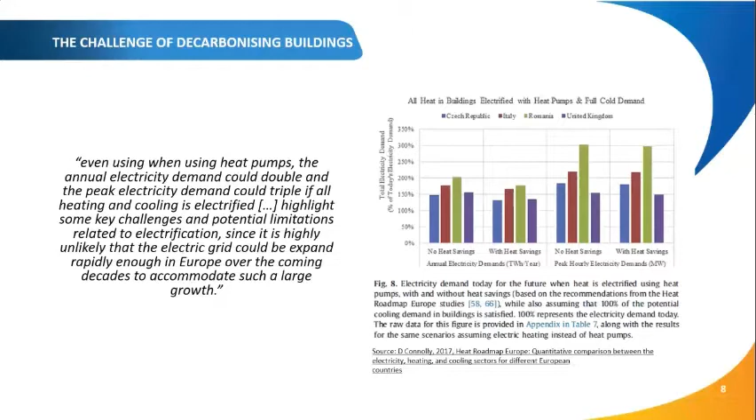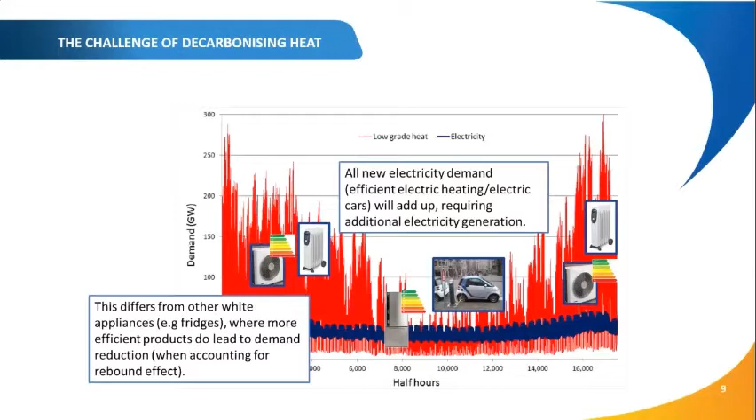Now, what is the role of cogeneration in that? Cogeneration has a single input, which is a molecule. It can be biogas, natural gas, or hydrogen. We have two outputs. So a primary energy is transformed into two final energies. One is heat and one is electricity. And the nice thing about cogeneration is that those consumption peaks occur at the same time.

So if there's a heat demand, we generate the electricity. And in today's energy world, we also have an electricity peak often occurring from heat, electrified heat, like a heat pump, which is basically an efficient electrical heater in this respect. It's transforming electricity into heat and extracting some of the heat from the environment.

So we are basically perfectly complementary with cogeneration, as whenever the heat pumps produce a peak on the network due to the heat demand in the buildings, cogeneration is providing the heat to its local building, but also providing the electricity to this building at the same moment in time. And with this complementarity, the proportion of heat pumps and fuel cells should be adequate to have savings on different levels, and I will come to that in the next slide.

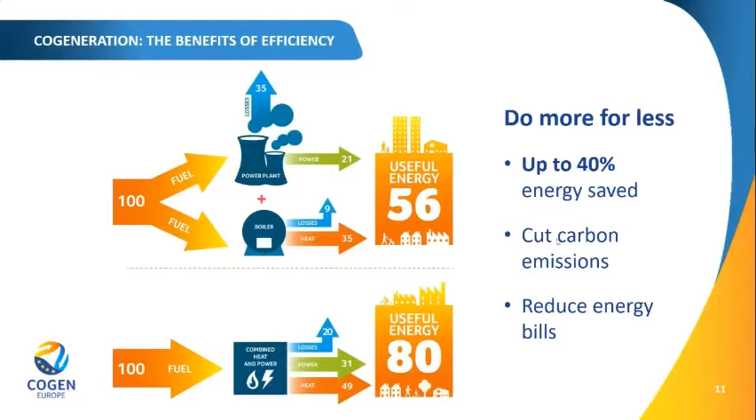Within Europe, we have several cogeneration technologies. Overall, we have 100,000 micro-CHPs installed in buildings, and more than 10,000 are stationary fuel cells. This is the recent technology that has now started to be implemented at a bit larger scale. COGEN Europe has a very active role in two deployment projects, Ene.field and PACE. And we look forward to the cost reduction achieved through those projects for further deployment.

But CHP can also be applied not only in the residential sector. The more common one is CHP to feed district heating networks or larger public buildings. And finally, in industry, combined heat and power is a quite standard technology for many applications where you have a continuous need for higher amounts of heat. You also exploit electricity generated locally.

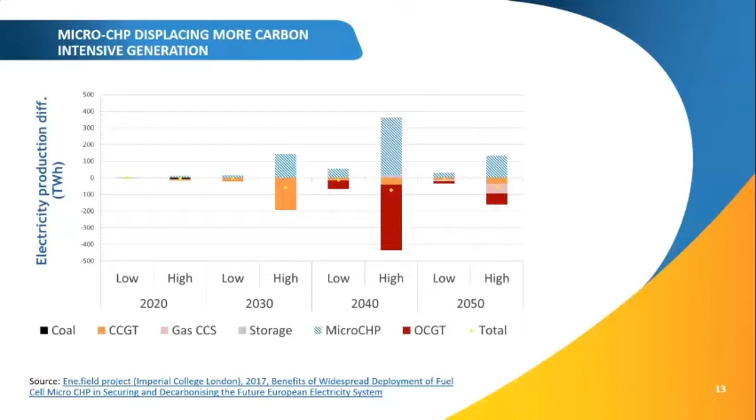Out of the studies that we have pursued, we see potential for micro-CHP uptake of up to 31 gigawatts by the year 2030. Important to understand is that by producing the electricity locally, very close to the end user, we avoid grid reinforcement costs. We avoid grid reinforcement costs on the one side in the low voltage sector.

We are producing the electricity at 240 volts in the customer's house, but you also see other effects in the medium and high voltage grid that are still significant, because the gas infrastructure allows a more extensive use. The gas infrastructure is higher in power density and has already been built for a long time. There are significant reserves available to distribute this out to the end user.

And deploying micro-CHP at a large scale provides the option to have up to 28% of the EU's projected grid reinforcement needs covered by micro-CHP. So it means you don't need to have a long-term investment in the large electricity infrastructure that, besides the cost, also has an issue in terms of speed of deployment.

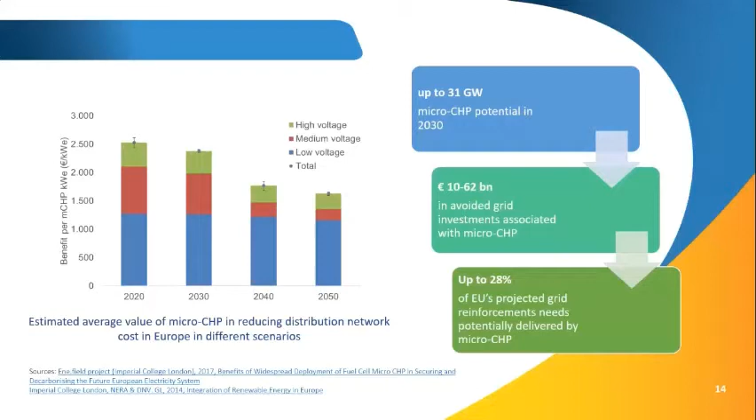So what does micro-CHP do overall, or cogeneration overall? It is linking the different sectors, creating an arbitrage between the electricity, heat, and gas systems. This, on a system level, is improving the overall efficiency. It's very important. It is not wasting the heat out of an electricity generation process, but directly using it.

But it's also compatible to the use of, for example, excess electricity under the form of hydrogen or biomethane, or cogeneration in other district heating cases often uses lower grade biomass to directly generate both the heat and electricity locally.

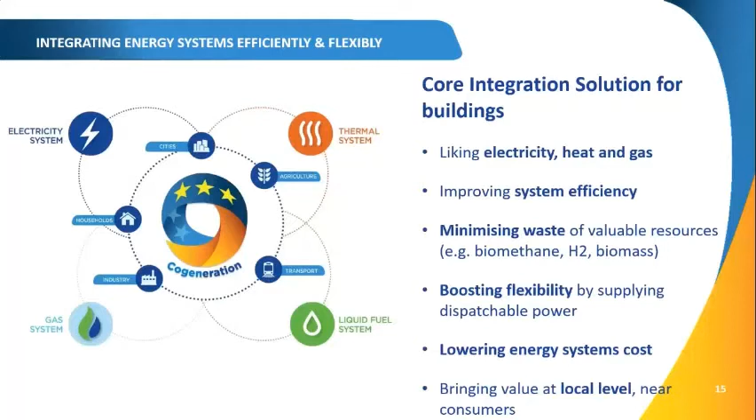Micro-CHP are small plants, so they provide flexibility to the grid, dispatchable power, and overall they lower the energy system cost. And also important, wherever you have those systems, they need to be maintained and installed. This is local job creation, in a distributed way, and not at a single large power plant. Next slide, please.

Next slide, please? You have an issue with this slide? Or is it my screen that is frozen? We are on slide 16 at the moment. Okay, I am on slide 15 in my screen. That must be my screen. I apologize. Okay. Oh, now it changes also. Yeah, okay.

So, what does cogeneration provide overall? It cuts carbon emissions already today with the installation and reduction in the primary energy, and it's forward compatible to the reduced carbon footprint from the gas grid. It lowers the energy costs at the end user by the reduction of the primary energy usage. It is integrated with renewable energy vectors, and overall we have energy savings.

Important as well is it empowers citizens and businesses. It creates autonomy, and the local energy production is helping to create and stabilize the overall grid. It provides the flexibility in terms of balancing with the different schemes of electricity production that are intermittent, so stabilizing overall,

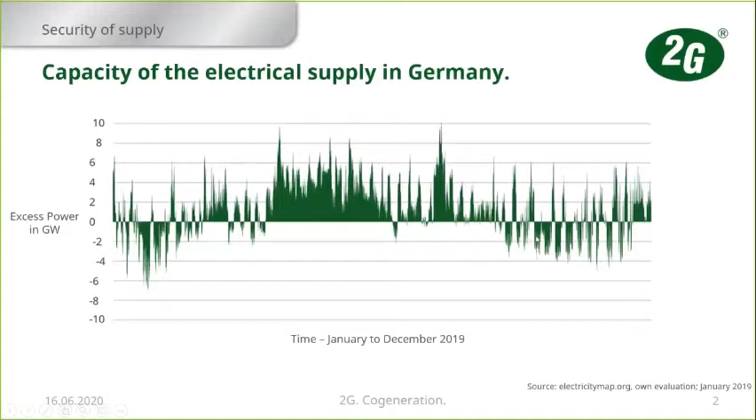But there are also wide ranges where there's too little power, and wide ranges in the summer, for example, where there's too much power. And the reason is mostly the renewable energies which are fluctuating, especially wind and sun. And we think that it would be a good idea to use the renewable energy power to produce hydrogen, to shift this energy to the times when we need the energy. So how could such a system look?

Of course, the source is always wind and sun. These are the renewables. And of course, it makes sense to use the electricity if it is needed for homes and industry. And for the peaks, we can use a battery storage. This makes sense.

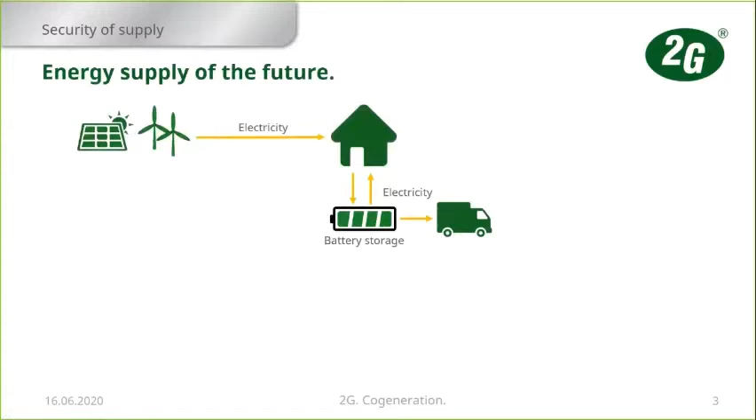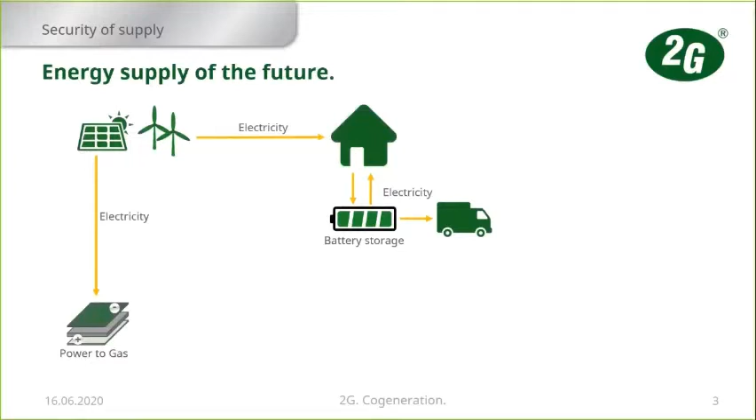But to use it for the long term energy capability, we can produce hydrogen with power to gas plants. And this hydrogen can be used in two ways. The first way can be methanization, so we can put it in a gas, store it in gas storages for natural gas and use it for normal CHPs. This can also be supported by biogas plants. And the second way is that we use this hydrogen directly for these CHPs.

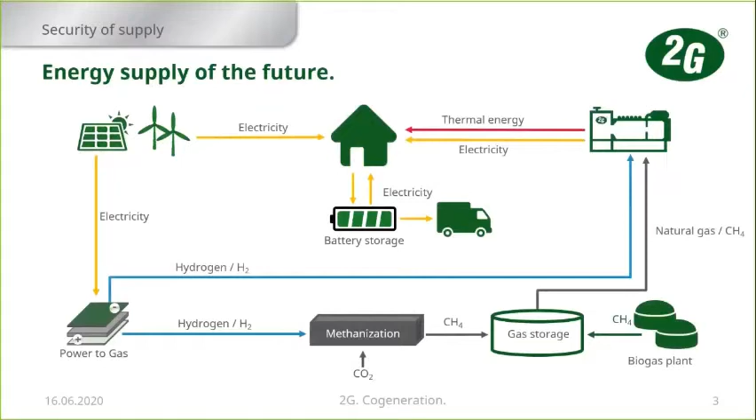So this is what is done in Haßfurt. Let me introduce you to the Haßfurt concept. Haßfurt is a small city in Bavaria. The local utility provides energy for about 20,000 inhabitants, and they are very innovative concerning CHP, microgrids, and district heating.

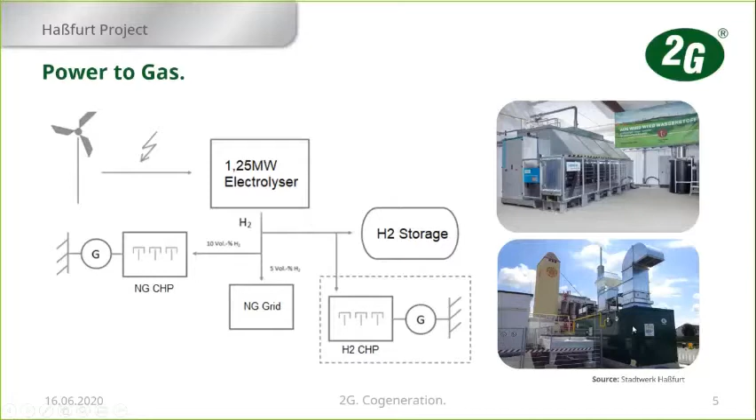So what is the engine technology that enables the use of hydrogen? Especially it's the gas injection. Because if we want to burn hydrogen, we cannot use an external gas mixer. The gas mixture between hydrogen and air would be much too dangerous because of the high flame velocity of hydrogen, and so we need a gas injection.

And we decided to use a port injection, so it's not directly into the cylinder. It's an external mixture formation, but close to the cylinder. This is a big opportunity for the Haßfurt plant because then we need much less pressure than we would need in a direct injection.

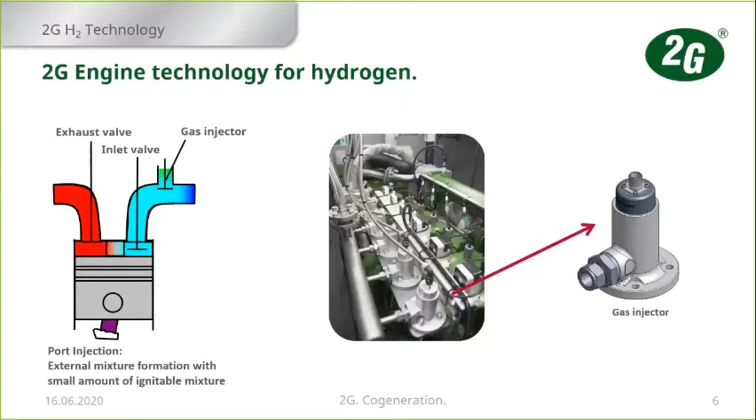And the second highlight on this engine is that it's a dual fuel engine. We can use hydrogen and natural gas. So this enables the utility, if the hydrogen storage is empty, to still run the engine on natural gas. And the engine doesn't have to be stopped for this switching. We can make the mixture while the engine is running and switch slightly to natural gas.

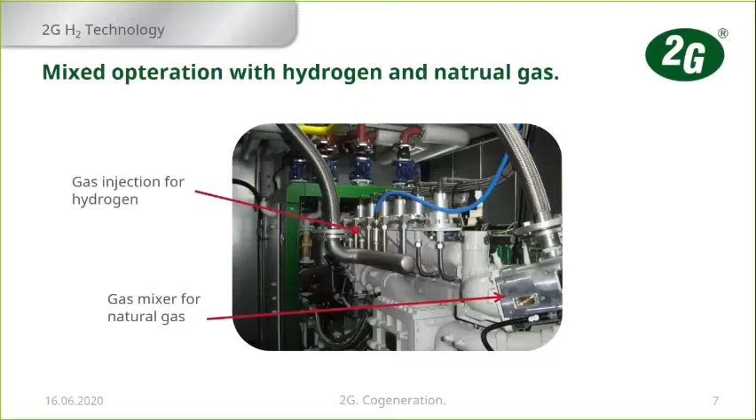In the last step, let's have a look at the environmental compatibility. Because as you know, it's still an engine, and of course emissions are a big deal. And on this slide, we have an overview of the NOx emissions concerning the lambda. The red line is for natural gas, and the blue line is for hydrogen.

And what we see here is that if we use hydrogen, we have a very wide operating window with very high lambdas, without ignition failures, because of the low ignition energy of hydrogen. We can burn it very lean, and this enables the engine to run on very, very low NOx emissions. So it's very environmentally friendly.

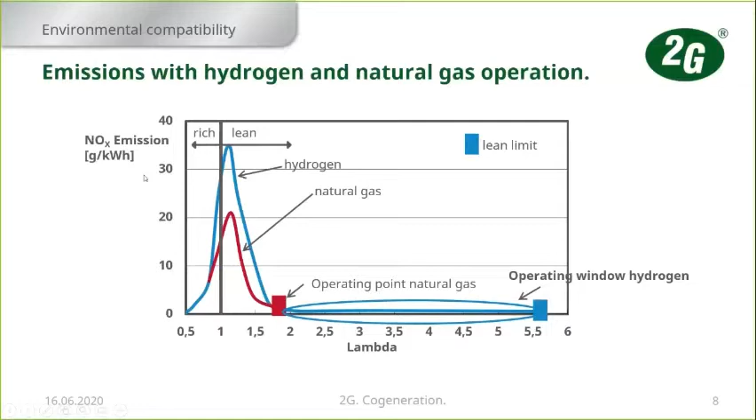Yeah, and in conclusion, we think that cogeneration with its efficiency can support the new renewable energy, and it can bridge the gap between the energy consumption and the capacities of our ecosystems.

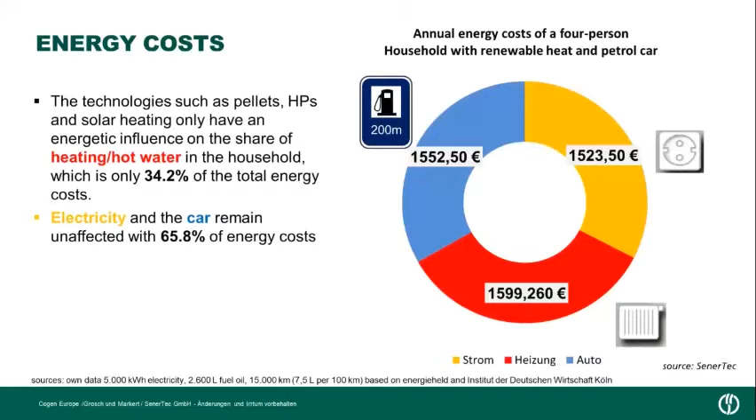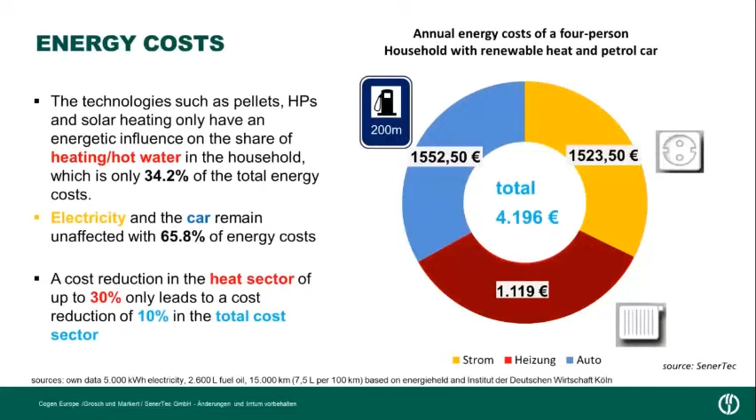So let's have a look at what can be done when you use pellets, heat pumps, or solar heating, which only have an impact on 34.2% of the energy costs. That would mean you can take the heat out of this and make savings on that. About 30% of the heating you can save with these renewable energy producers. And overall, the costs would only be 10% less.

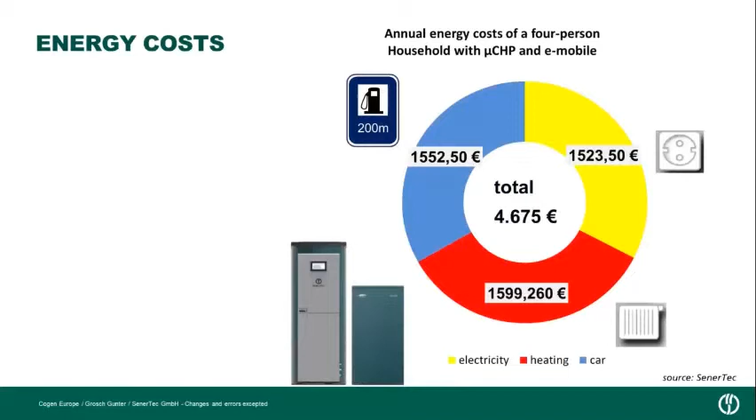Let's take a look at the micro-CHP unit in this view of the four-person household. A fuel cell micro-CHP has an impact on all three sectors: heat, electricity, and the car. And this would reduce the total costs by 30%, not only the heat. Therefore, heating with gas, generating electricity when heating, and driving with electricity. The numbers show you that it's the best way at the moment to save most of your energy in your household.

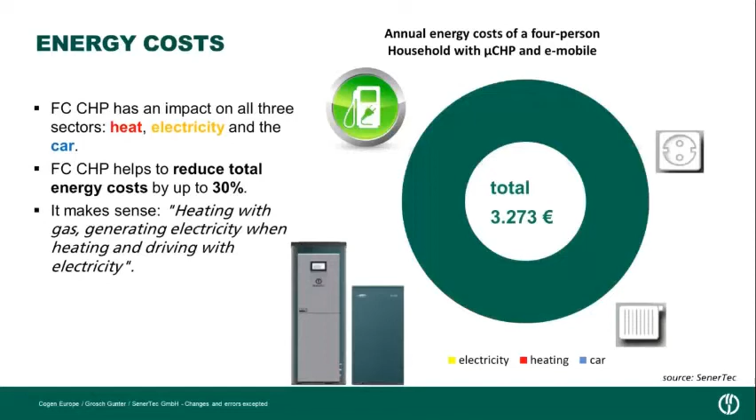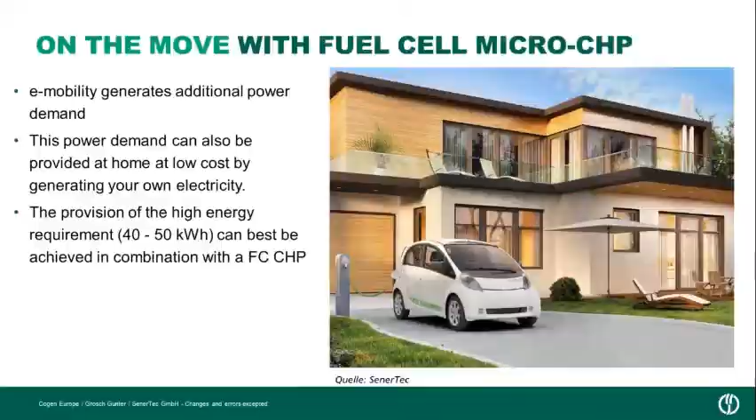On the move with a fuel cell micro-CHP system, e-mobility generates additional power demand. This power demand can also be provided at home at low cost by generating your own electricity. The provision of the high energy requirements, 40 up to 50 kilowatt hours, can best be achieved in combination with a fuel cell micro-CHP. I will underline this with two case studies from our customers.

The first is a building built in 1996. It is a semi-detached house with a living space of 135 square meters and 4 inhabitants. The energy data are from 2015 and 2016. In 2015, before changing the energy system, a gas condensing boiler consumed 13,849 kilowatt hours, and the electricity demand was about 5,000 kilowatt hours.

Then they installed a Dachs InnoGen system from us in 2016, and from that time on, the gas consumption is 18,000 kilowatt hours a year, and the electricity from the utilities is only half, 2,520 kilowatt hours. That saves 850 euros a year in this household, and they are very pleased with this decision. I will come later to the motivations, how the decision was made.

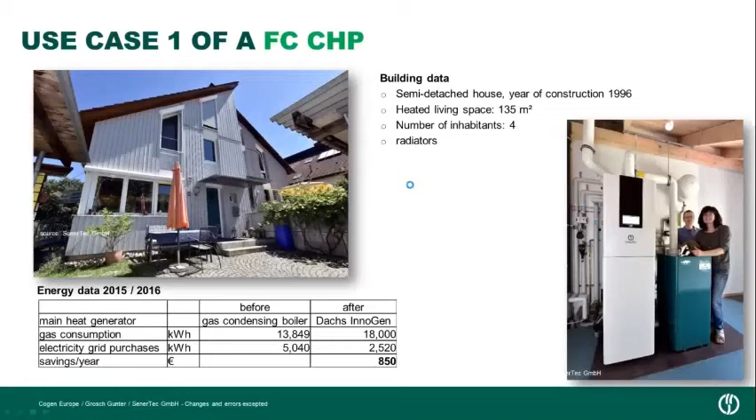The next case study is a semi-detached house, constructed in 1963, with a living space of 130 square meters. Windows and doors are already energetically renovated, and this was done on the advice of an energy consultant who told them it would be good to do this first. Also, roof insulation would be very good; the brick wall is not necessary, it's okay.

What he then decided was not to do the roof insulation. He wanted to install the fuel cell heating system. He has taken a fuel cell with a peak load boiler, also integrated in our system, and a fresh water station using the flow-through principle. So Legionella have no chance in the system. He also added a battery storage of 6 kilowatts.

And then the energy data before he changed his heating system: an oil boiler that needed 2,500 liters a year, and his electricity demand was 3,100 kilowatt hours. With the new Dachs 0.8 system, the fuel cell MICRO-CHP, he only needs 1/3 of gas to produce his heat and power. And the electricity grid purchase is about 1,200 kilowatt hours. It's only an assumption because the system hasn't been running for 1 year; it was installed in November 2019. And the amortization is calculated at 12 years.

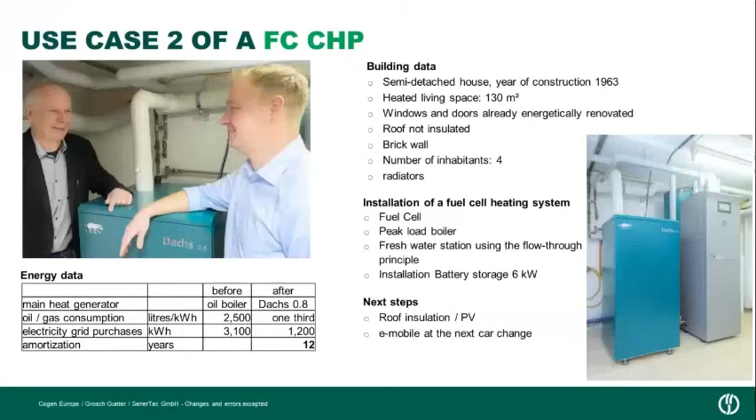And one of his key sentences was, "We have 2 children and would of course like to dedicate to them something that is valid for the future. Thus, energy efficiency and climate protection are especially important to us."

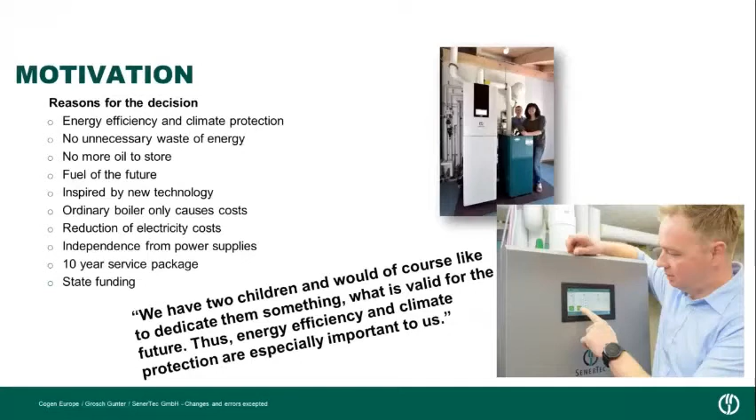Yes. And my last slide will show you the benefits for the buildings. It's electrical efficiency, the overall efficiency. Let's say the standard of heating is A+++ and also of domestic hot water. The fuel cell MICRO-CHP can ensure particularly low heating costs by producing their own power self-directed. The owners of the building are one step closer to being independent from the power supply, and it's virtually silent because there is no rotating system.

Supporting the energy system all over Europe or all over the world, lowest emissions, only emits water and air, largely free of pollutants, flexible use, capable of base and peak load power and heat supply. Flexible use of fossil fuels and renewables, as we have just heard from the 2G project in Hadbjerg, and fuel cell MICRO-CHP systems designed to utilize renewably produced hydrogen can contribute to linking the 2 sectors and decarbonize their energy system.

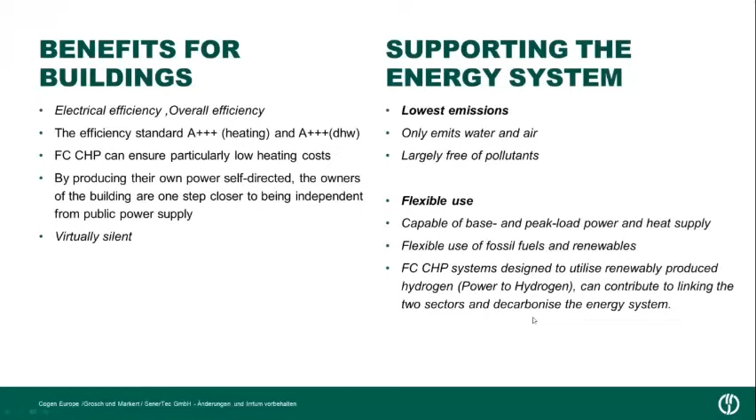Thank you, Gunther. Thank you for the introduction on fuel cells, as well as the two very interesting case studies of private citizens investing in fuel cell micro-CHP. We are now pivoting to our last speaker, Christian Neve from EC Power. I apologize if I mispronounced your last name. I'm looking forward to this presentation because it's about how cogeneration and heat pumps work together in the case of a school in Denmark. We hear a lot about how the two technologies can potentially be competing, at least in Brussels. However, COGEN Europe sees cogeneration as a complementing technology. We heard a little about it from Olivier Bukele at the beginning. Christian, you have the floor.

Christian's presentation is currently uploading, so we should be going in a couple of seconds. I seem to have some slight technical difficulties. Christian, can you hear us? I see Christian is muted. I tried to unmute him, but it's not possible. Perhaps while we resolve this, we can take some questions. Yes. So we have so far two questions. Sorry, I'm back online. We can hear you, Christian. Should I continue, or are you in the middle of a question? No, we were just going to pivot to the questions in the chat. But now that your presentation is up and running, let's continue and take the questions at the end. The floor is yours, Christian.

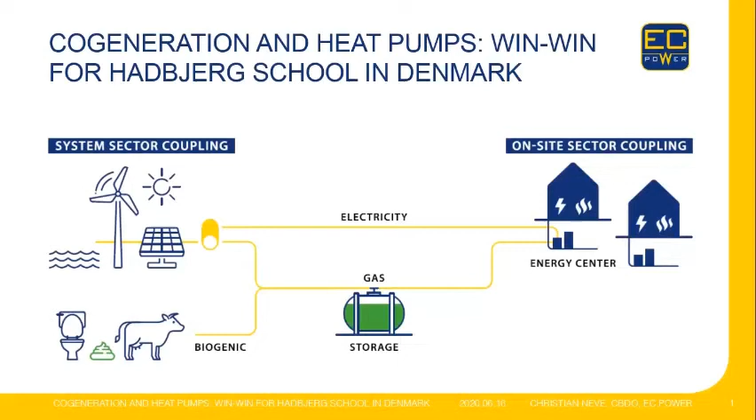So just a few words about EC Power. For almost 25 years, we've designed, installed, and maintained energy centers such as the Hadbjerg Skole case, which we'll get back to. We have more than 10,000 systems in operation, and our main facility is in Denmark, where we produce micro-CHPs. And we have subsidiaries in Berlin and in the US.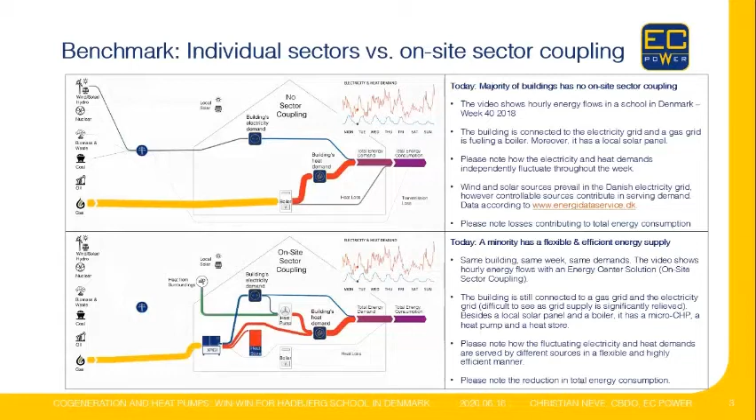So let's get to the case. Hadbjerg Skole is a municipal school which has seen quite a few renovation waves. It was built in 1928, and 2 expansion projects turned it into a modern school with 440 students. The on-site energy center, which consists of a CHP, a heat store, a heat pump, a boiler, just as you saw in the simulation, was built in 2017.

This new energy center covers 63% of the electricity in the building. The rest comes from the grid. Naturally, it covers 100% of the heat in the building, and now only 10% comes from the boiler. The overall total energy efficiency annually is about 120%. So what does this do for the end customer?

Well, with the gas boiler and the electricity from grid, the school had a carbon footprint of 113 tons of carbon per year. The end user, the municipality, has basically 2 options: buying natural gas and the general power mix from grid, or buying green certificates on both electricity and gas. With the latter option, the carbon footprint is 0. However, hour by hour, each day, what comes out of the socket is a mix of the sources that are present at that time of day.

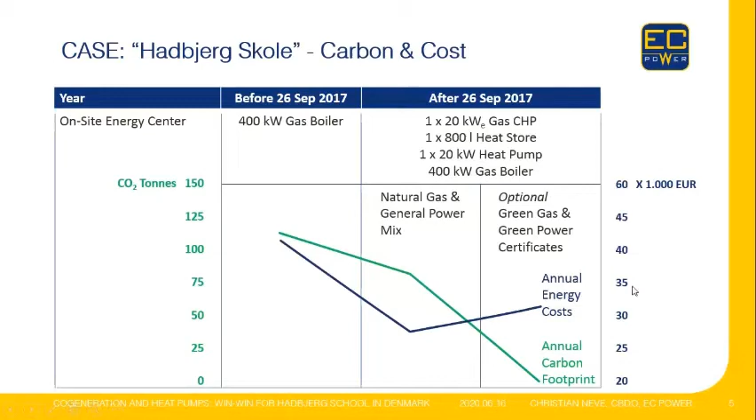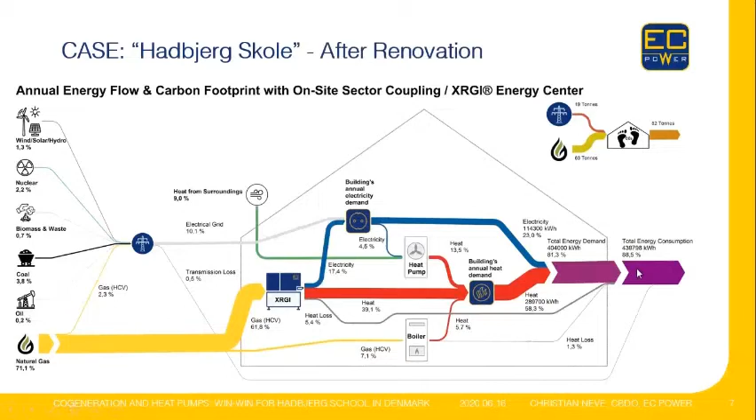When we look at the situation after renovation with the new energy center, we can see that the total energy consumption is now 88.5% of the former 100%. The losses dropped 11 to 12% with this new energy center. We can also see that the coal electricity share is only 3.8% now.

This percentage could be even lower if real-time electricity prices or marginal carbon signals and incentives for grid export were present. Then the energy center could be even more responsive to availability and also to the climate.

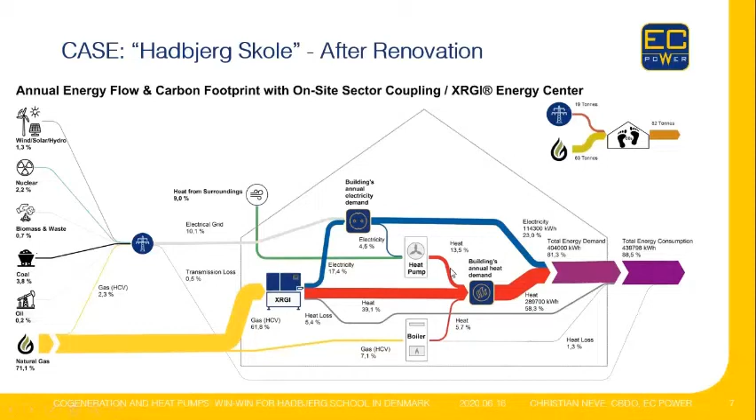So it's not new, nor is it limited to single homes or buildings. You can actually provide energy for a small community as well based on these systems. Yes, so let's wrap this up. Energy centers with cogeneration and heat pumps offer flexible and energy efficient sector coupling at site of consumption. The system efficiency can be up to 160%, whereas for individual sectors we're significantly lower, also corresponding to the figures that Olivier showed early on.

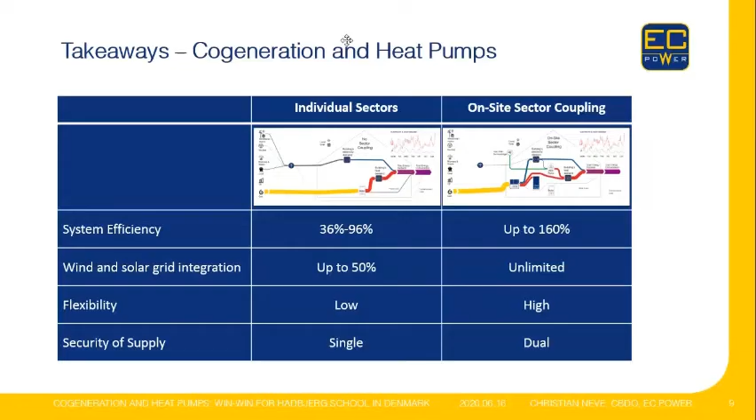The first question goes to Stefan from 2G. The question is about the pilot project and how is it financed, now and in the long term, and in your opinion, what would be the key factors allowing the replication of this good example in other contexts? Yeah. Hello, Arthur. Thank you for your interesting question. At the moment, in the time of the research, the project is financed by the Bavarian government, but this is only by the end of this year.

Then this financing ends. After this year, the project will be financed by a combination of a virtual power plant, providing positive and negative power, and in combination, the energy is sold to the Greenpeace Energy group. Because the primary energy source is wind, they sell a product: the hydrogen, which is produced by the wind, is called wind gas, and they sell this wind gas. And if you produce electrical energy by the CHP from this wind gas, they sell it also as wind energy. So it's sold by Greenpeace Energy.

Okay. Thank you, Stefan. There was another question to Gunther, but he took the opportunity to answer it online himself. It was in relation to the cost of a fuel cell micro-CHP unit. For those of you who are not looking at the chat function, he answered it could be approximately 25,000 euros, including the installation. But there are a number of subsidies available, up to 11,000, depending on where you live. It may be a local, regional, or a national, federal subsidy in support of the uptake of efficient technologies.

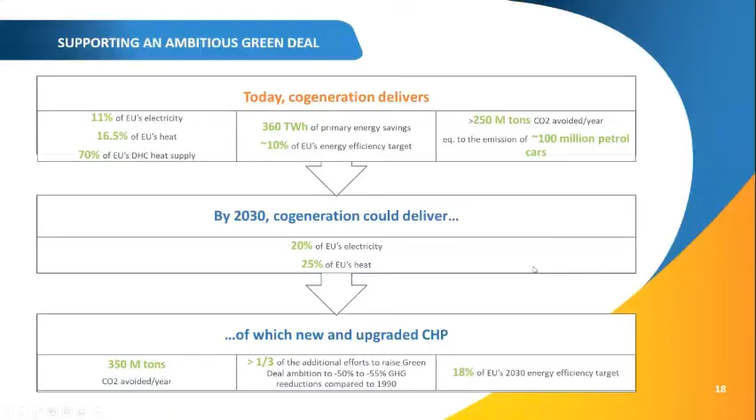My slides are not quite cooperative.

So as we've seen, we have a diversity of applications for buildings in the cogeneration range of technologies and solutions. When it comes to CHP for district heating, there are several benefits where these district heating networks are in place in cities mainly with high heat densities. CHP will supply efficient and affordable heat for residential areas and commerces that is delivered to customers through district heating.

And of course, there's a need of investments both in the district heating networks and in the modernization of the CHP or the boiler that is supplying that heat. It produces flexible electricity, supporting the local electricity grids at times of low wind or sun. If you enable that energy system with heat storage and smart controls, cogenerated heat and power can actually be decoupled and provide even greater flexibility at very high efficiencies for the electricity system.

And so with all of this combined, CHP will ensure a smart systems integration at the local level, while also addressing local pollution. What we see in some cities is that even if there's an infrastructure for district heating, many of the customers are disconnecting from the district heating networks and install individual apartment boilers, sometimes very inefficient, which also contributes quite significantly to NOx and SOx concentrations in the city. So by enabling efficient district heating with cogeneration, you are actually addressing some of that local pollution.

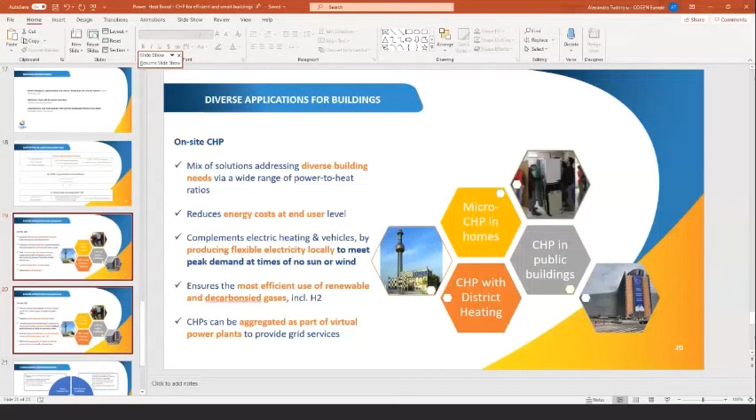When it comes to energy efficiency, we must have energy efficient buildings, that's no question, but we must also apply energy efficiency across the whole energy supply chain and across all energy sources. So efficiency of demand must be complemented by efficient supply solutions.

And in that case, CHP is a key building solution that should be taken into account. Then we've talked a lot about the electrification of end use. In this case, the electrification of buildings is seen as one of the key solutions to decarbonize and improve the efficiency of buildings. Yet, in order to ensure that, we must make sure that buildings are electrified in a smart way. So we must have robust criteria to promote renewable and efficient electrification of buildings.